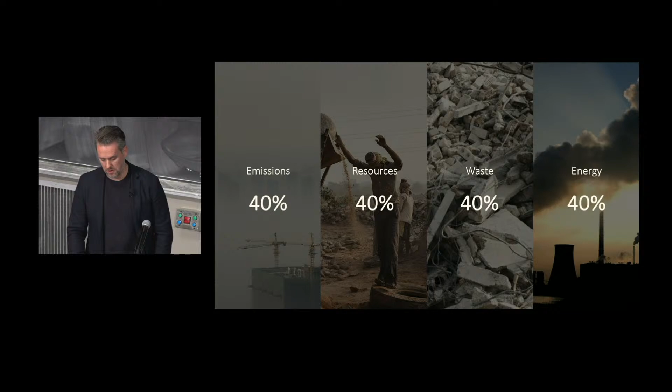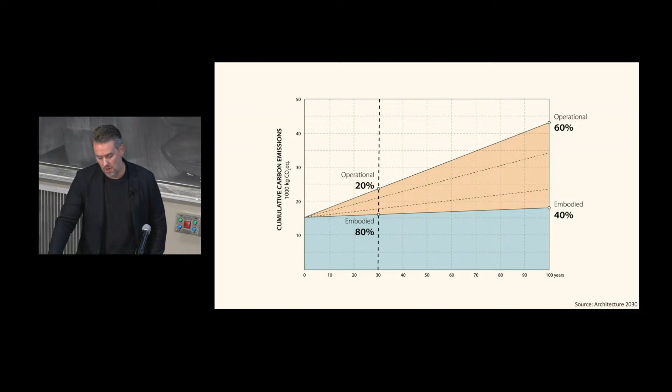These are rounded global numbers of the impact of our industry, building and construction, on man-made greenhouse gas emissions, resource consumption, waste production, and energy. Today I will be talking about the blue part. We can discuss what the percentages are. There are two key contributors to these emissions, the operational emissions and the embodied emissions. The embodied emissions have to do with materials, with building, and operational, as it says, is once we turn the key and use the building.

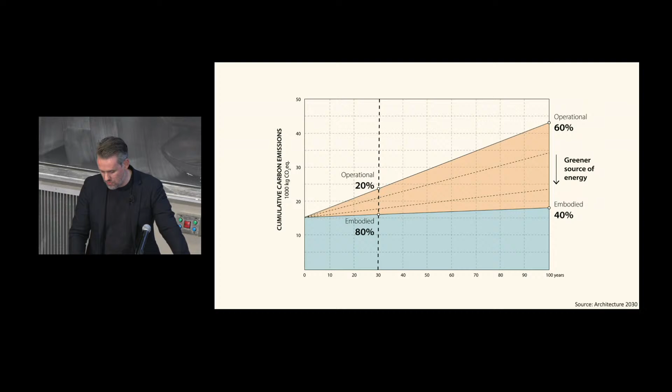One of the reasons that I'm excited to be a structural designer is that, in a cheeky way, I could make a bit of a shortcut here and say that if we have the political will and we all use green sources of energy, then operational emissions, check, right? That is not the case for embodied emissions. So there is no silver lining. We really have to rethink fundamentally how we do things.

This will be the only equation, because I'm also part engineer, so one equation seems appropriate here at MIT. You see again some usual suspects appear: John Ochsendorf, very early work with Catherine de Wolf, my colleague at ETH, also an MIT alum. I like this equation because it's simple and it very clearly shows the three main levers that we can use to reduce the global warming potential of a construction. Again, I'm talking about the embodied emissions. So what you see here is MQ, material quantities, right?

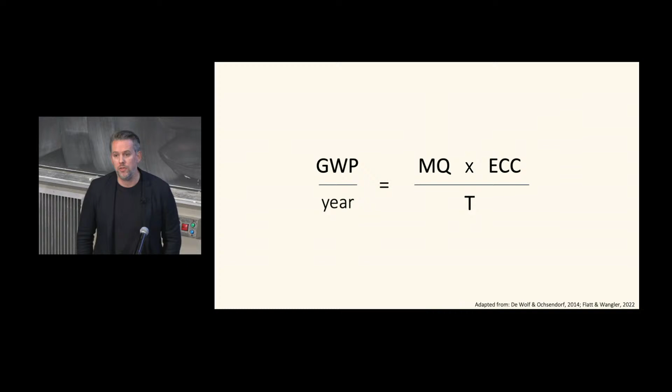Then we see ECC, embodied carbon coefficients. So per material, per where you use this material, you can calculate what the impact of that material is. And then T stands for lifespan, service life, so that has something to do with time.

So what's clear is that we want to reduce the amount of material that we use. To reduce the global warming potential, we want to use better materials with lesser impact. But we also want to actually rethink what is the lifespan of a resource, be it a material, a component, or a building. And I insist on standing here because I think sustainability is too often unnuanced and simplified.

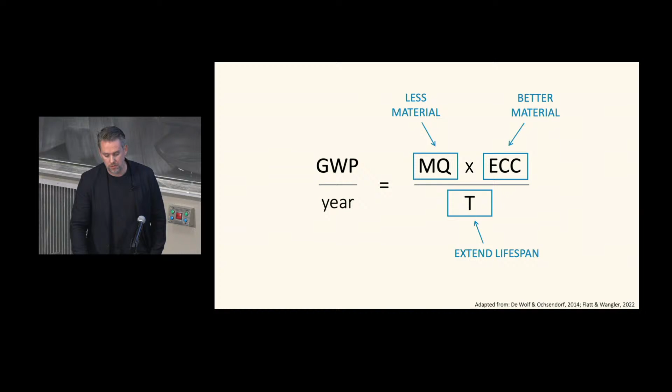And you hear all the time, wood is good, concrete is bad, for example. But here you see that it's a bit more intricate. You have to start to make compromises between these three parts. So the first one again is clear, less material, better material, and then can we find ways to extend the lifespan of our resources? So our group has been looking at this with these three approaches.

The first one, strength through geometry. This will be very clear what I'm talking about there. Second one, material effectiveness. As you see, I'm not using the word efficiency because it's not just about lighter, for example, but it's about using the material how it wants to be used. And then I will show you how we wrap it all together and we can extend lifetime by really being very precise about circular construction.

So the first one, strength through geometry. There, another quick wink to my advisor and eternal mentor, John Ochsendorf, these beautiful fan vaults at King's College. They are spanning 13 meters with simple stone that is standing still after more than 500 years because they have the right geometry. And the continuous bit is roughly 10 centimeters, so a few inches thick. So if you calculate the thinness of such a shell, then this is proportionally equivalent to an eggshell.

So when I started at MIT, there was a little bit of a resistance that I would be working on old structures. But the more I was working on them, the more I realized that we might have really forgotten quite a bit in modern design and engineering. So how do you even find the geometries of these structures? How do you know how safe they are? And so this was the starting point of my PhD indeed.

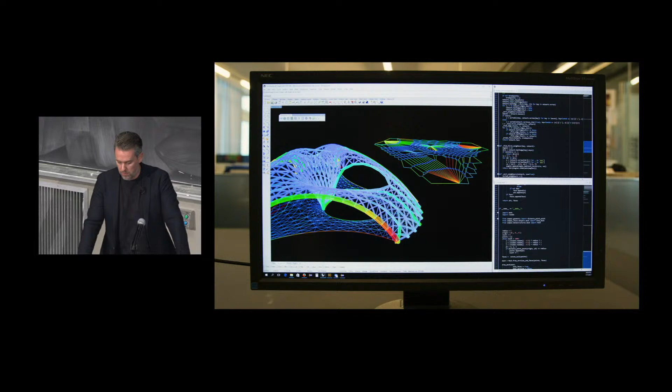We shared these tools very early on in tools like RhinoVault, so that this knowledge would not just be stuck with us, but everyone could start to explore. But you can do whatever you want on the computer. You can make a lot of fancy pictures. So we took the invitation of the 2016 Venice Biennale to clarify that this really works, that this is not just a fun toy to explore things.

What you're looking at here is called the Armadillo Vault. These are 399 pieces of cut stone that are held together like the old, beautiful Gothic masterpieces because of their geometry. So there is no mortar, there is no glue, there is no reinforcement. These pieces of stone were dry assembled by expert masons from Texas, the Escobedo group. And this then resulted in this statement.

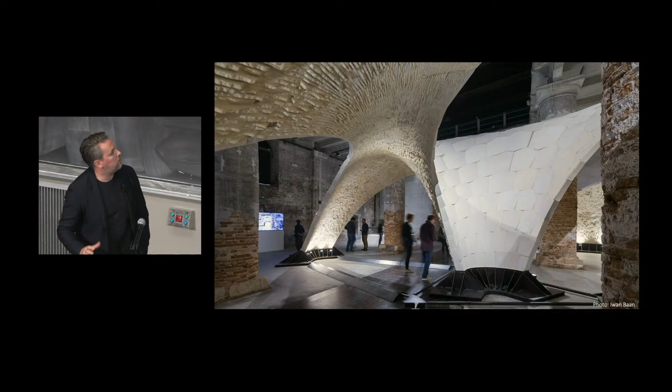We wanted to clarify that we should bring back these elegant principles that make a cathedral still stand after centuries, not just as an aesthetic statement, but really also a statement about efficiency and the beauty of achieving strength through geometry and not just through materials.

Of course, I could give you an entire lecture on what we had to do to realize this project in just 5 months, all the way from the new design tools and engineering tools to the fabrication optimization. But I want to stick to the narrative and what I want to show you with an image like this. So again, remember, there's nothing holding these stones together, only gravity, only their geometry.

So here we're talking about not even 2 inches of contact. And I hope this image speaks for itself, that if you get strength through geometry, you can significantly reduce mass, for spanning space in efficient ways.

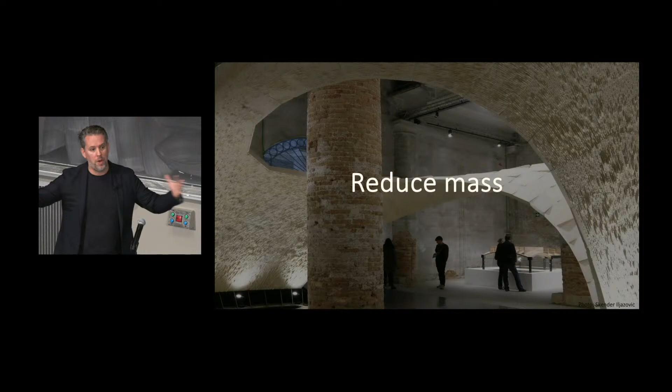I will piggyback on a project that I was very thankful to be part of, not from the beginning, but I could use my brand new concepts from my PhD to assess the safety of these vaults. You all know this project well, Mapungubwe Interpretive Center in South Africa, a project by Peter Rich, John Ochsendorf, and Michael Ramage. This project introduces tile vaulting, a Mediterranean traditional technique that doesn't need any formwork or scaffolding to realize these structures. So you build in stable sections from the boundary conditions onwards.

And so this technique was, of course, introduced in such a remote context because resources are scarce, and it was really important to activate local resources, not just the local villagers, but also local materials. So this is beautiful Catalan vaulting, Guastavino vaulting, tile vaulting, timbrel vaulting at work.

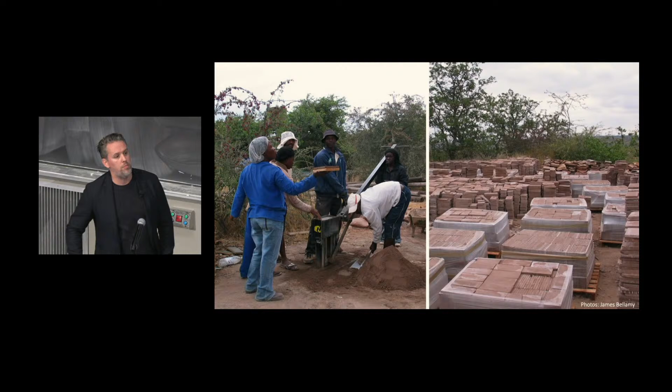But what's special about this project is that it didn't use the typical fired bricks that are used in the traditional techniques, but instead unfired soil-pressed bricks with a little bit of cement to stabilize them. And so these bricks were basically built by the local villagers one year in advance.

Why am I showing you this project? It's an older project, but when I see these 2 images next to each other, I'm still surprised that this works. On the right, you see that the tiles are brought on site in very small packages because they are actually extremely weak. They're designed to just take 1 to 3 megapascals in compression. I actually don't know what that is in PSI. So it's basically peanuts in compression, 10 to 15 times less than a standard concrete.

If you take one of those tiles, you can just break it in your hand. So this is not a material that you would consider intuitively as a structural material. And on the left, by placing the bricks exactly where the forces flow in compression, you see that this is indeed a robust system. And in fact, that is how we used to build. In many basements, you see these kind of little vaults appear. No surprise, because we wanted to activate these humble materials.

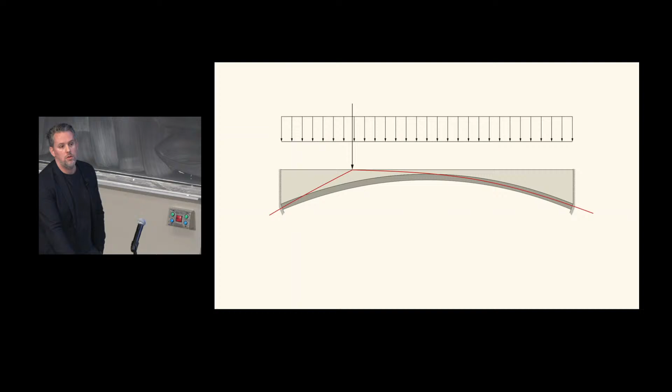Quick teaching moment. An arch is a very good geometry for a certain loading case. If you don't have a lot of double curvature, like in the Armadillo Vault, then you need something to take the live loads, right? The red line represents where the forces want to flow to the supports in compression only. So another strategy than using double curvature is to add stiffeners so that you provide a possible load path in compression for these forces to find their way to the supports.

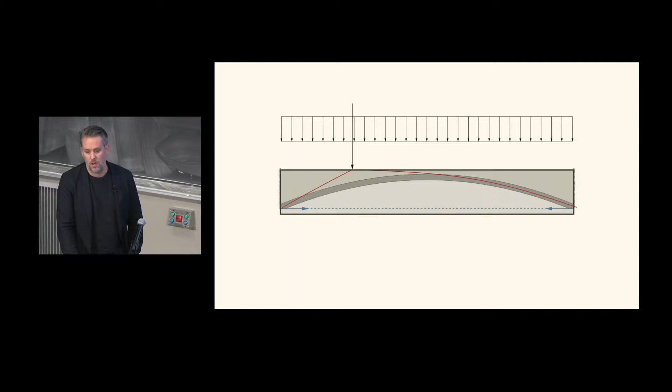And then if you add a tension tie, why the tension tie? Because an arch pushes on its neighbors, and so you can absorb this horizontal thrust with a tension tie. What I've just done with you in the last 20 seconds is basically providing a 100% structurally equivalent system to our reinforced concrete floor plates and beams, but one that uses 70% less material. So this is really not rocket science, this is just physics. And so this is quite dramatic, isn't it? Just by listening to the material and following where things go.

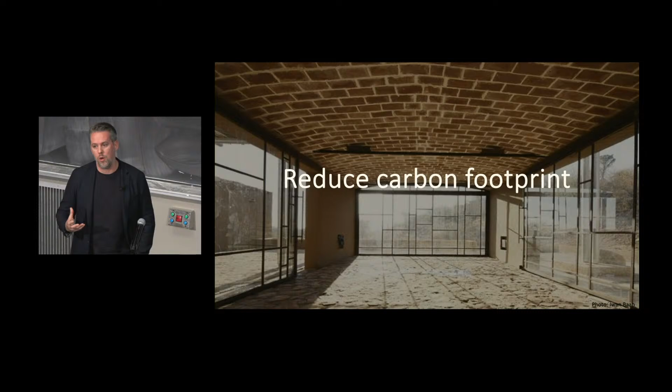And that is important because there's almost a one-to-one relationship between how strong a material is asked to be and what its carbon footprint is. So this is a second aspect why I care about activating strength through geometry, because we can reduce mass and reduce carbon at the same time.

Okay, big jump to this project here.

I will talk about it in detail later, but it looks a little bit unique. This project started in 2011 when I was almost a fresh professor at ETH, and I thought building shells was what one wanted to do. So let's quickly look at the roof.

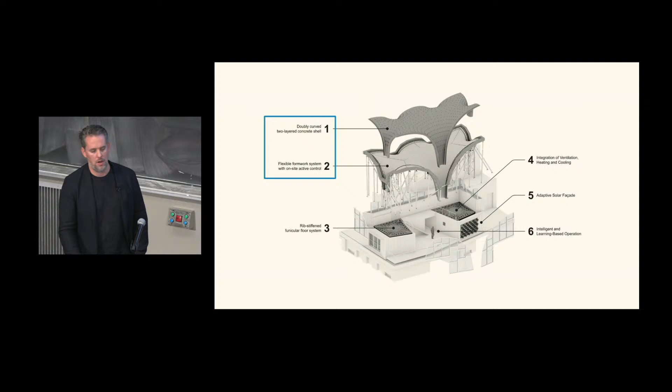So what we did there, and why I show you this, is it's another version of strength through geometry. There we actually use strength through geometry to make very efficient formworks rather than the structure itself. The reason for this is that structural geometry is non-standard geometry, it's curved geometry, and so we can design whatever we want. We want to be able to realize then these forms efficiently.

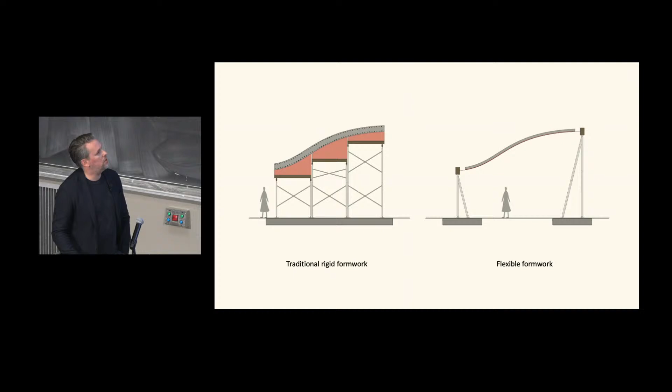And so what we wanted to do in this project was to use a flexible formwork where we then really understand how to basically stiffen that formwork because of its geometry again. So in this case, we go from compression only to tension only. So we developed this tensile formwork. We developed a kit of parts where all the cleverness is in the nodes, so that we could actually scale up this idea of flexible and fabric formworks to the scale of real construction.

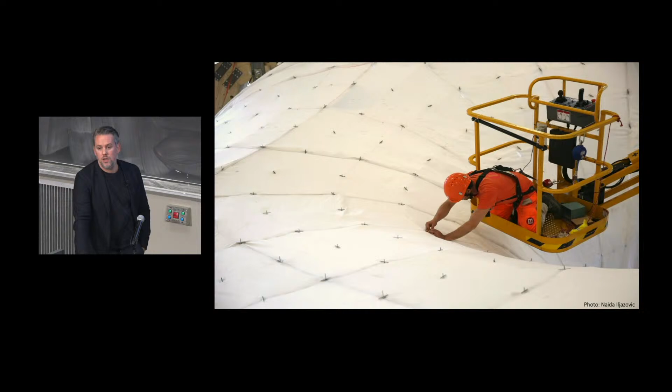These nodes allowed us to know exactly where the formwork is, to develop algorithms to retighten and really control the entire flexible formwork. But also the node actually helped to reduce this crazy complexity of the global efficient shell to a local reference of every 40 to 60 centimeters. The regular worker had that reference, where to place the reinforcement, how thick the shell had to be, how to install the insulation, and so on.

So this was a prototype. John talked about our facilities. So in this case, no robots were used, but we built this full-scale mock-up. And then we went on site with this building kit where the cable net, by the way, supports the wet concrete, and then the fabric allows you to apply the concrete on top.

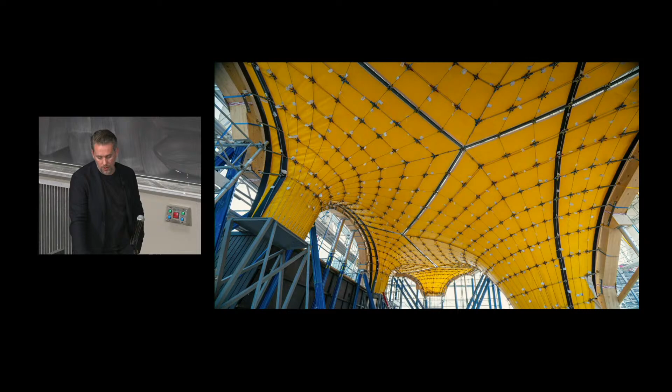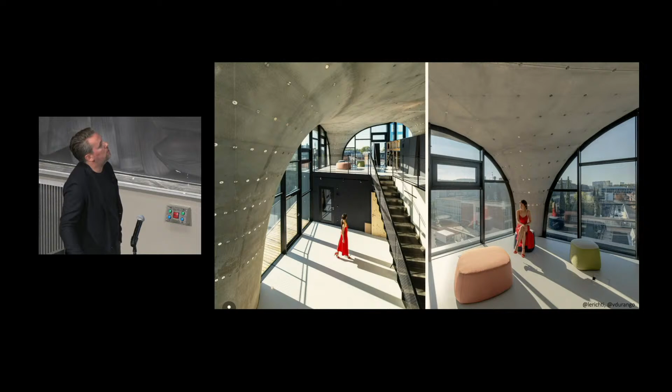So this is not a beautiful concrete, unreinforced shell as what I will be talking about mainly, but we're still talking about only 5 centimeters and 3 centimeters. It's a double layer shell of a thin structure here. So a quick digression, but nonetheless, we managed to use strength through geometry to make a super lightweight, efficient formwork. And you know you're doing something right when an influencer visits your project and takes pictures.

Another reason why I talk about this part of a project is because this was the first project that we did entirely using COMPAS. COMPAS is an open source computational framework for collaboration and research in the AEC industry. So it allowed us to really combine and introduce all these innovations into a real project. This is a permanent building.

And so all the way from coupling the fabrication to the FE and so on, this is not that new. But what is new also is that we used it, as our engineering colleague called it, BIM on steroids, so building information modeling, to connect all these different partners, more than 40 subcontractors that had to come on site, many of which had absolutely no experience with computation or complexity.

All right, let's get back on track. So the first one was strength through geometry. So I showed you that we can really address already 2 of the 3 levers with strength through geometry. Let's talk about material effectiveness. So when I talk about concrete, and I will be talking about rethinking also construction in concrete, you typically think of this. But this is actually not concrete, this is reinforced concrete.

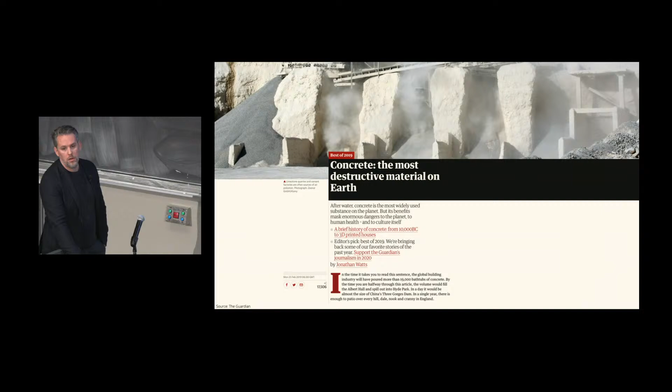And indeed, we have been using reinforced concrete because concrete is like stone, a material happy in compression, but not in tension, not in bending. And that's why we have to make this hybrid material. So concrete has been under a lot of scrutiny. It's the evil on this planet, as many state very, very clearly, like here, a big feature by The Guardian in 2019. But is it correct to just focus on the material? I already gave you a hint in the beginning.

It's not just about the material, but it's the combination between where you use the material, how you use it, how much, and then also the lifetime. You can use all kinds of charts, from the famous Ashby to the ICE, which is one of these databases that calculates embodied carbon coefficients here per unit mass.

The LCA or sustainability experts in the room might say unit mass is not the correct metric. That's not my point. You can use any calculation. You will see that if you look at concrete itself, then it is not that bad of a material. In fact, it ranks much better than other typical materials we use, engineered timbers, steels, and so on.

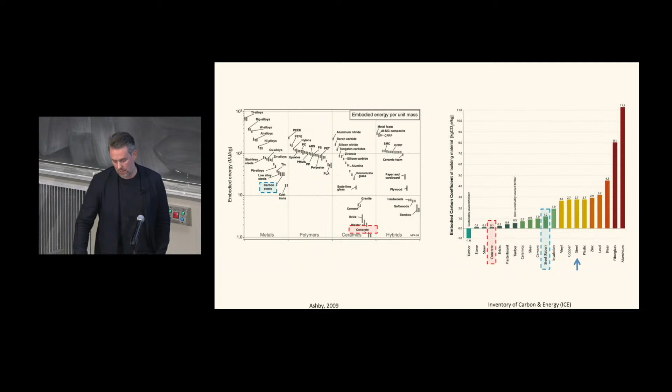You see that steel is at least 10 times per unit mass higher on the embodied carbon coefficient. And by the way, I'm using 100% recycled steel because that is common practice, at least in Europe, for any reinforcement. So if you were to use virgin steel, then you are talking about factors of 30. The point here is that what about we start to look at concrete as the artificial stone that it is? And you probably see where I'm going with this.

So if we listen to the material stone, artificial stone, then perhaps these beautiful geometries of the past are indeed the right geometries. So indeed, we already looked at this. We can not only reduce the mass globally by 70%; more precisely, instead of forcing a material to be in a geometry that it doesn't want to be, that flat floor plate or beam, you reintroduce the natural arch, then you see that we, for free, get 70% reduction of concrete and 90% reduction of steel.

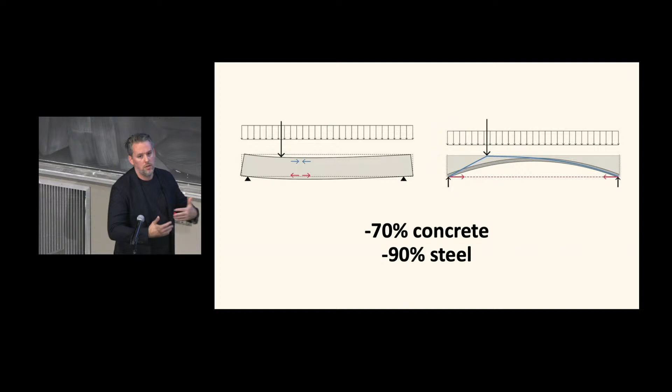So we thought, okay, instead of only having the simple arch with the stiffeners, can we do more? And we translated this in 3D. So what you're looking at here is a structural model that is a 3D vault that accumulates to corners. Then you see that the stiffeners that take any loading case in compression to the corners also accumulate to the corners. And then what you just need is a restraint of the corners that, for example, can be a tension tie.

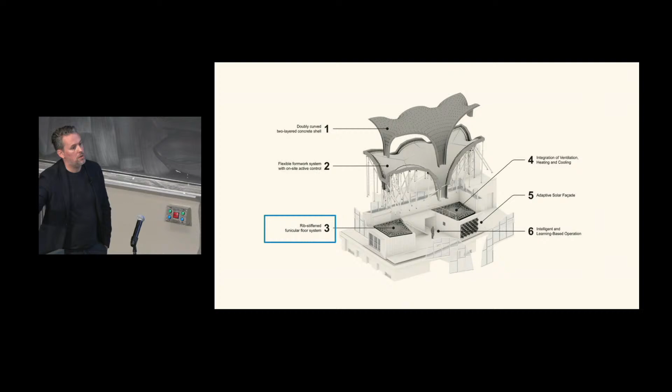And that is also why I showed you that crazy project with a wild roof, because it was the first time that we could, in a permanent building, show this concept in our context, so in Switzerland. So the floors that you look at have an average span of 5 meters. But if you look at the section, the structural thickness of these floors is 3 centimeters. So how much is that? Just over an inch? Yeah. So 1 inch thinness, unreinforced concrete, low strength concrete with more than 50% of recycled content.

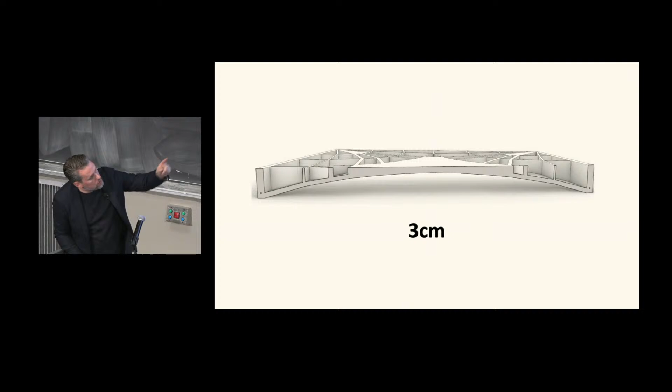By the way, maybe you've noticed this little dot there at the corner. This little dot is actually drawn to scale. So we have a 12 millimeter steel rod that holds it all together. So that is the only reinforcement bar. So of course, dramatically different than how we build our structures. You can go visit it. Everyone is very happy in there. There's no cracks. Everything works perfectly like the Gothic or any masonry system indeed.

All right, why am I excited about this one project here? Well, we have some more challenges, not just the global impact, but also the next 20, 30 years there will be many more people on this planet. People like Bill and Melinda Gates in their annual letter in 2019, but I believe others before, have calculated this to really clarify what the challenge is for our industry. In order to provide adequate housing and infrastructure for all these people still to be on this planet, we will be building the equivalent of one New York City every month for the next 40 years.

That is really a daunting task, already considering that we have these very negative impacts. Another aspect is that we are densifying, we are building higher. This is not necessarily my vision of the future, but it is a reality that we have to address also the typology of medium high-rise construction.

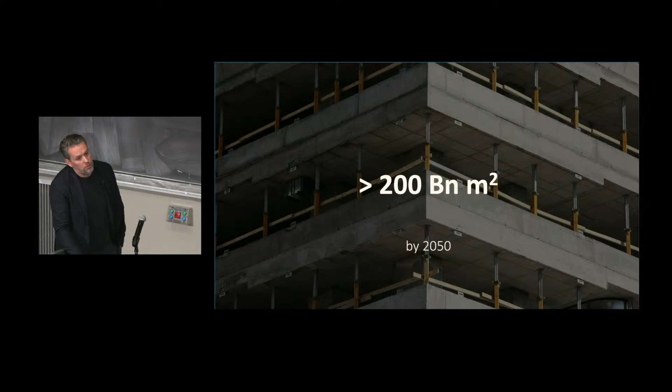If you then zoom in a bit more, then you see that more than half of that structural mass is in the floors. So another way to translate this New York City story there is that we will be building more than 200 billion square meters. So that is 2,000 billion square feet in that same period, right? And so we can maybe talk about in certain contexts that we can no longer construct, but this is not relevant for the rest of the world. So let's hopefully and please not do it like this, right?

So let's go back to these structures and let's take one of those. So just to clarify to you what the impact could be of reintroducing these simple principles in everyday construction. So what I'm going to do with you is take a simple building, a simple floor plate here as a reference, 25 stories with 7.5 meter spans here. And we will introduce the principle that I talked about to replace all your typical reinforced concrete floor plates. So we will be, of course, taking advantage of the fact that more than 40% of the weight is in the floors, and we will count on those savings.

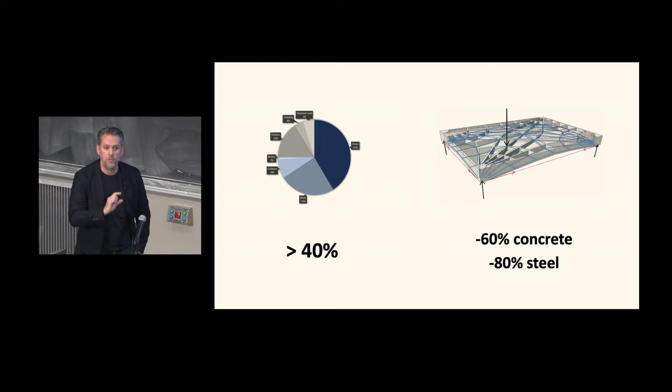You see that we are no longer at 70-90, because in a real building, it's not just about structures, it's also about acoustics, vibration, fire safety, and so on. So you have to put a little bit more material in there. So what happens? What are the savings by just replacing the floors by this principle? You would save more than 7,500 cubic meters of concrete for this one building. If that doesn't mean anything to you, I translated this for you. This is more than 1,200 concrete trucks that would not have to go to this one building site.

And per story, so per level, you would save about 26 kilometers of reinforcement steel. So that is about 16 miles of reinforcement per story, which is a lot of reinforcement altogether. And coincidentally, it nicely rolls out from Zurich, where I happily live and work, to Brussels, where I'm proudly from. So that is more than 600 kilometers of reinforcement steel.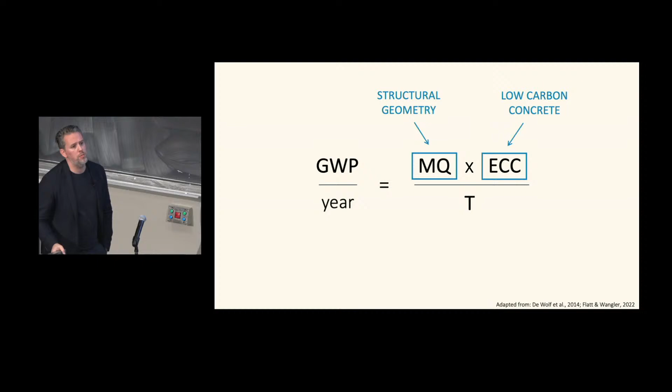So in the beginning, I said it's not just about the material. Here, I should also not get carried away by just being proud of these volumes. What really matters is, again, the equation. So it's balancing the two. So what have I been saying here? So structural geometry, I think this is clear to you. We can directly reduce the material quantities. We can use state-of-the-art materials. So for example, the low-carbon concretes that are already commercially available today.

But structural geometry, remember, also gives you another benefit. It actually allows you to reduce the stresses in the system. So you can actually use lower strength materials. And let's see how that plays out if you do a few numbers here. So structural geometry, again, gives you two things. Directly less mass, but also lower stresses.

And so sorry, I don't know what the equivalents are in the US, but C30 concrete is a very standard, almost very regular concrete. So you see that the mass we can directly take off, but by going to lower strength concrete, so from a C30 to a C16, so C16 is typically not used for structural applications, you have an additional 20%. And then the state-of-the-art today of concretes that use clinker replacements in their cements. So for example, a CEM3 concrete, you can, on the material level, reduce the emissions by another 2/3.

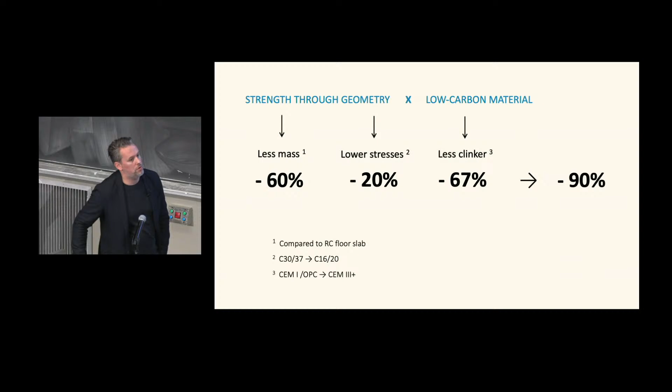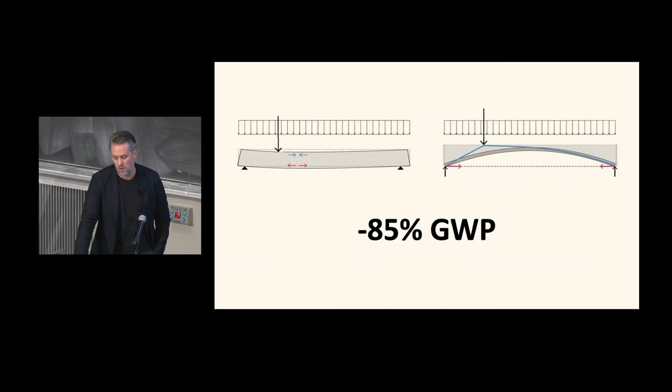So even though we take only 60% of material out, you see that the total effect is 90% reduction in global warming potential. We will take the steel as is. So this is what we can do today, right? And so again, this is not an exaggeration. This is just, again, following the steps very clearly. So instead of forcing a material in a geometry it doesn't want to be, we reintroduce the natural form, and we have today a solution to replace all our floors with a system that has a whopping 85% reduction of global warming potential.

So let's look at the numbers a bit more carefully. So if we were to build, as we always do, right, our typical reinforced concrete floor plates, then the best we can do is 50% reduction of global warming.

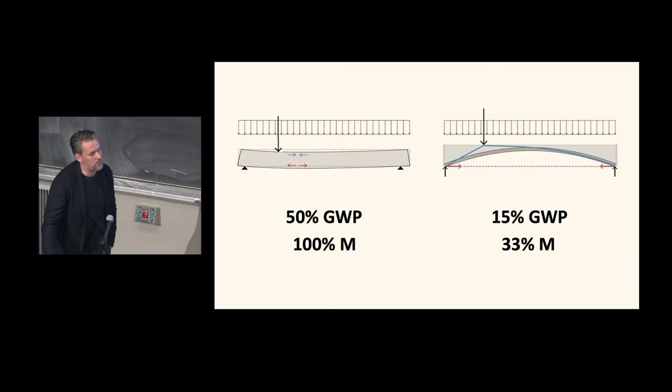Where does that come from? We're playing on the concrete, but we have the same amount of steel. So that ends up being a reduction of half. Not bad, of course, but we have the same mass. So the numbers on the right, you see that we have a much larger kind of reduction, but we also save on the weight.

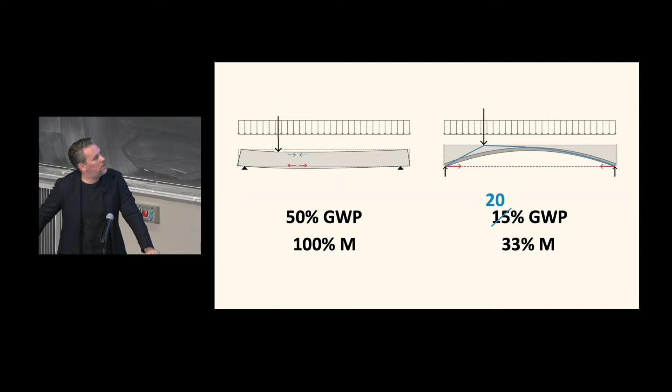What am I showing here? If you were to use regular concrete, so CEM1, OPC cement, so ordinary Portland cement-based concrete, which I think is criminal if you still do this today, by the way. So if you don't use any green concrete, then you see that we still have a reduction of 80%, right? So this shows you a little bit how important design is in doing things better, because everyone is talking about materials, and see now here how much design can have an influence.

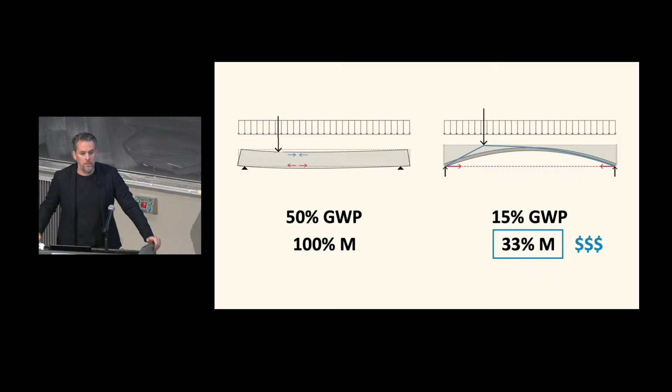Another aspect that is important to point out is here this weight reduction, because this is direct dollars. Bill Gates has introduced the term of green premium. What does that mean? That sustainable solutions, he says, will always be more expensive than our status quo, things that we have been optimizing for decades. Yeah, that is typically true, but so how can we then deal with this green premium? This is the strategy that we use.

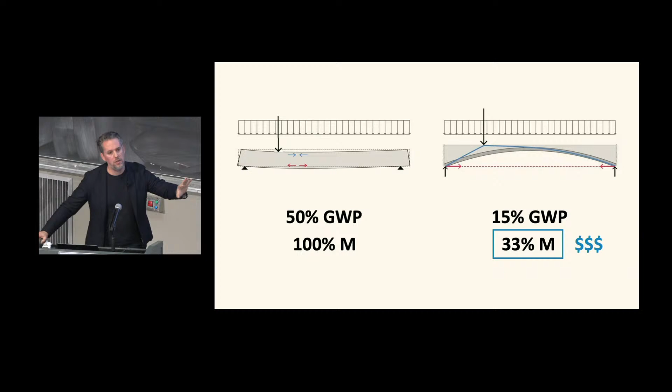Because our floor plates are so much lighter than the reference, we can save on the columns and, more importantly, on the foundations. And so that means that on the scale of a building, and this building actually doesn't need to be that big, already from 5 floors you see this effect happen. You can actually offer all of this sustainability cost neutral for the client. And I wanted to bring this in because at the end of the day, we can preach about sustainability as much as we want. If you want to have impact in real life, the cost is the only thing that matters, sadly.

All right, let's now bring it all together with circular construction. So here I will first do a quick tangent and show you a project where we made another statement at the Biennale. This is a fully unreinforced concrete 3D printed bridge. How does it work? So we used the same inspiration. We look at concrete as an artificial stone. So we look at stone in 2 ways. Global discretization, like an old aqueduct or a little structure here. But also on the level of the material, we wanted to basically have a perfect alignment orthogonal to the dominant force flow, right?

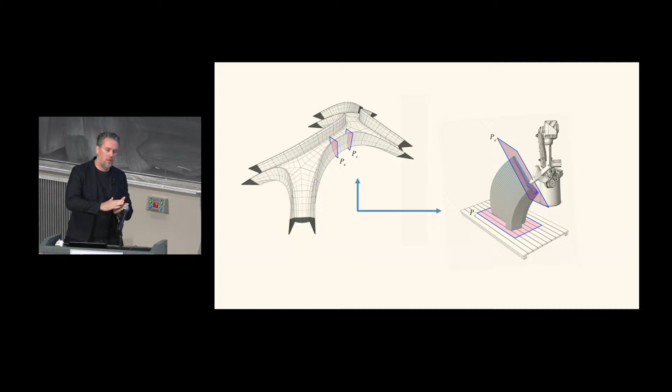So we use masonry on 2 levels. The global discretization of the bridge follows masonry principles. And then on the level of every single element, we try to align our material to be as perfectly orthogonal to the dominant force flow as possible. So this is possible because of 2 components, state-of-the-art 3D printing. You see that you can have these non-parallel kind of print layers and so on. And that allows you to place material only where needed.

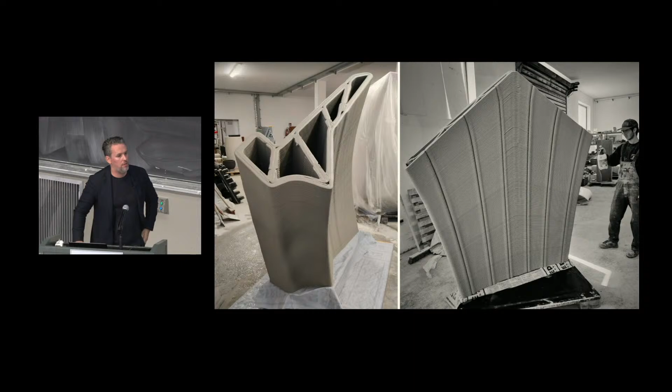So we want, for example, structural depth, but we don't want a full solid section. So we make a hollow section. And on the right, you see exactly where needed. These are these bifurcating elements, and we want to be aligned to the force flow. This small bridge that I showed you, so 16-meter span, 53 blocks, all of these pieces were 3D printed in a total of 84 hours, right? And so this is exciting. It's something to kind of look out for.

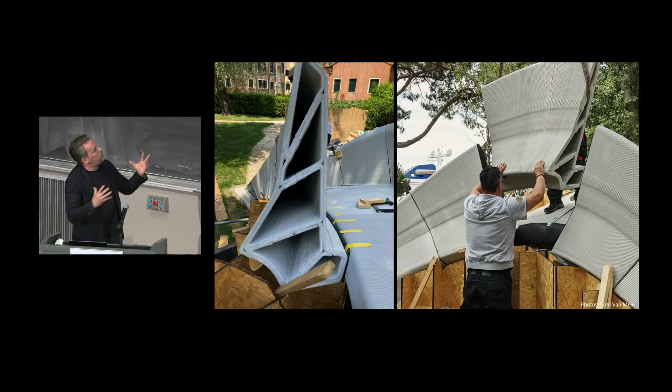So here then you see my team together with our usual suspect, Tom Van Mele, assemble this structure like a masonry system, dry assembled, again, to make sure that no one is confused about how this bridge works. And then here we basically put these pieces dry assembled together. You see maybe the black interfaces is neoprene; you need something to distribute the stresses at the interfaces, and so this is a dry, disassemblable kind of joint material that we developed for this.

So I was excited. This was a beautiful collaboration with Zaha Hadid Architects, with the CODE group, a computational design group, and incremental3D. I was excited that we could show this project, not only to celebrate its aesthetic, but also to really show that we hit several of these R's. So we reduce by placing material indeed exactly and only where needed. We think of repair, and in fact that was already relevant because one of the pieces broke in transport and we could locally repair it.

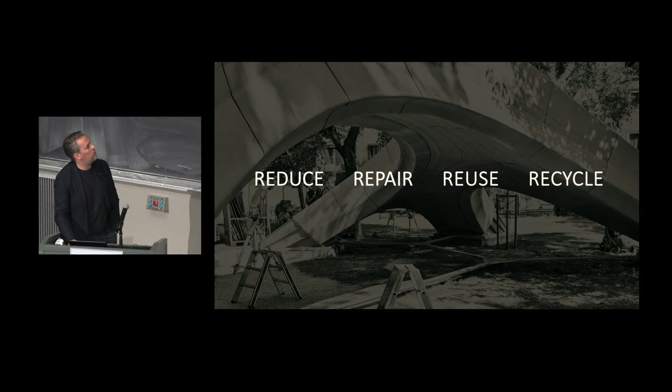We keep materials separated, so the tension ties are separated from the unreinforced structure so that we have an easy recycling opportunity. And also, maybe not that relevant for this bridge, but you put it together like a masonry system and you can take it apart as easily as it was assembled. So you could literally reuse these components in another project.

So this is how it looked. This was in 2021. You see some features, again, that were accidents in the fabrication that we then started to use to celebrate and show how this structure works. And so here we brought all these different ideas together to make a statement.

Those of you who know about concrete 3D printing, this was, again, a provocation. We wanted to show that perhaps if you listen to this material, perhaps this is how you want to use it instead of trying to print full houses and causing a full mess that you have no idea how to maintain, how to upgrade, how to recycle at the end of lifetime and so on. So this was a bit of a statement in this direction.

But for me, the key point here is, again, circular construction made possible because of masonry on different levels. So this is the next step for me. It's not just about strength through geometry, but it's also about pure masonry systems that give you all of this circularity. I show you this just as one of these after-the-fact computational pipelines.

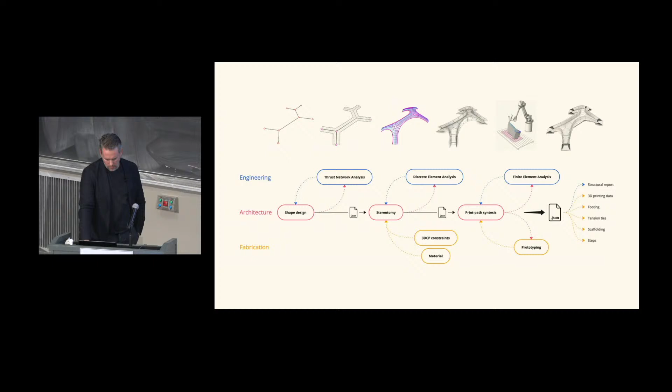I show this because on this project, the entire team, all the way from designers, engineers to fabricators, never met a single time because the project was done 100% during COVID, and we only met at the opening of the bridge. And so this is again where computation, where COMPAS brought all of us together to build on each other's strengths and specialties.

The sponsor of this project was Holcim, because there is a nice connection there. We had an opportunity to actually do a second iteration because this was for an exhibition, so it was only there for a couple of months. So this is Phoenix. It's called Phoenix because it was built from the ashes of Striatus. We took it apart, we ground it, and this bridge was built entirely out of recycled Striatus.

So what's also special about this project is that this is now a permanent structure. So we used a totally new 3D printed material. This was built in Lyon in France. If you know France, it's a very bureaucratic process to get anything built. So I'm very proud that we have a permanent structure, a 3D printed structure using a 100% recycled kind of binder.

So what we also did: you could have criticized me, like, yes, but you make this efficient structure and then you build it with all this timber. So here we developed, again, a kit of parts using rented components and only very locally the use of timber. That allowed us to pre-assemble things, assemble it really quickly, and really also to go one step towards a possible commercial relevance of these projects.

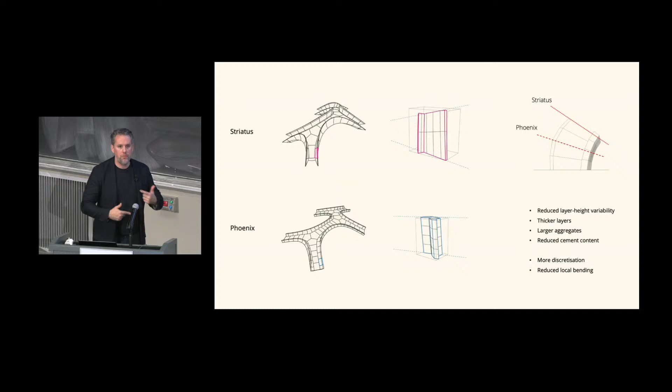Nothing comes for free. So how did we learn from Striatus? We reduced the block sizes so that we don't have these extreme angles. Why is that important? Because then we can use a lower strength concrete, a real concrete and not a cement paste. So we had to restrain all the degrees of freedom here. We optimized the internal stiffening schemes.

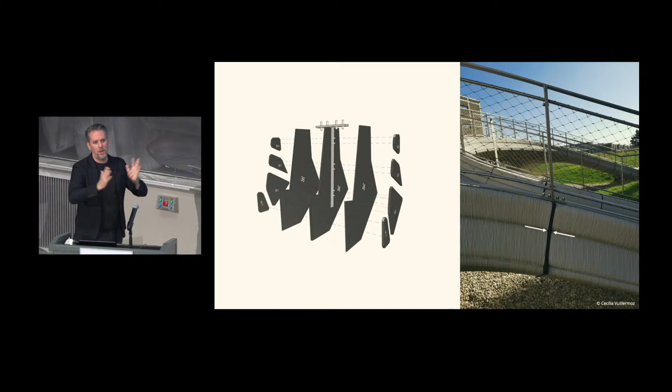But also, and I'm pretty excited, I always teach this beautiful Padre Pio church by Renzo Piano. I don't know if you know this project, but it's super elegant how basically the roof is being held by these arches. So finally, in a very humble way, we managed to have the balustrade not connected at all, but just held in place by the arch action itself.

Again, this was an important detail because that meant that the entire structure can be taken apart very simply, and circularity was directly taken as an important design driver. This is part of Striatus shredded, so it becomes basically the material for the next project.

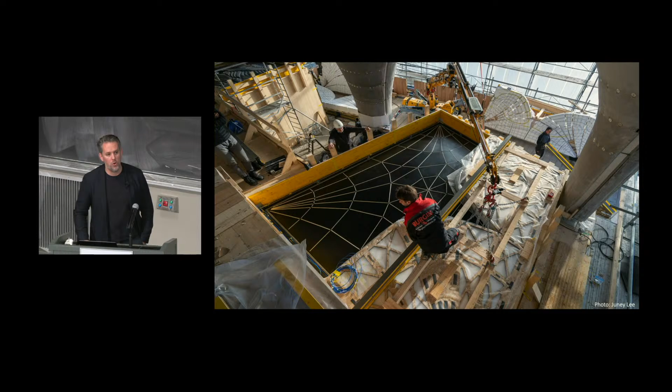What I didn't say there, and remember, we are in the part circular construction. What I didn't tell you earlier, when we had our 3 centimeters of beautiful shell and so on, is that we built it like this. On a one-off mold, super expensive, super wasteful. Then we left the counter mold in it as well. We used polyurethane, big no-go, and so on.

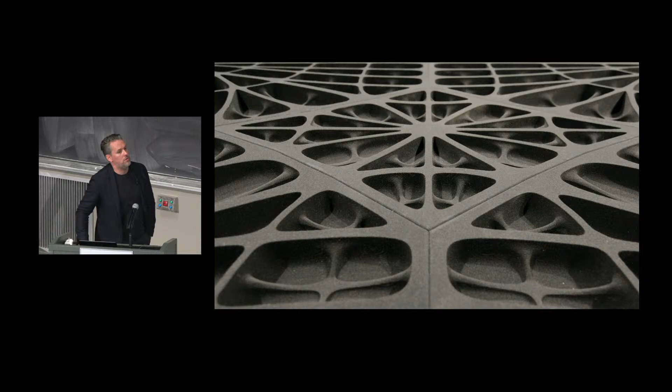I hope you forgive me that we were already trying to push quite a few things in a real project, 3 centimeters, unreinforced, and so on. But this is clearly not a scalable way. This is not a sustainable way forward. So that meant that we basically addressed everything on top, but we didn't address the service life and the circular construction on the bottom here. So we evolved our system. We took this first success, this first benchmark, to go to what we now call the Rippmann Floor System.

So here I will combine everything that I've talked about. We use our low strength, low carbon concrete. We keep our material fully separated so that we can easily recycle it, and a fully unreinforced structure gives you also all kinds of durability benefits. You don't have embedded reinforcements that you have to protect that could corrode over time.

For the material scientists among you, you can have carbonation happen the entire lifetime. That means that you absorb CO2, which typically you cannot do because that causes corrosion to the reinforcement. So here we can happily have this happen. We do dry assembly, like the masonry system. Again, this gives us an opportunity to take the structure apart and reuse the components directly.

And then last but not least, we add prefabrication, so off-site, very precise construction, so that we don't have all these crazy safety factors that we need on site, because concrete on site is a messy business, right? So it also looks good.

So we had the success of the HiLo unit, and there was quite a bit of interest. And that is why we actually were happily forced to start a spin-off appropriately called Vaulted. The reason that we set up this spin-off in early 2023 is because we actually already won a competition with the famous Mike Guyer from Gigon Guyer Architects, an entire building designed entirely around the Rippmann Floor System.

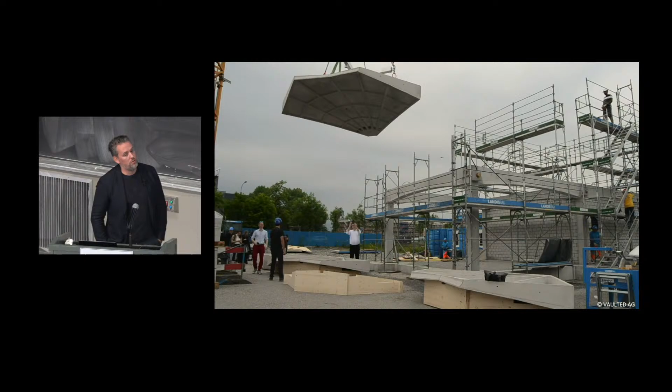In Switzerland, by the way, a tower is anything above 25 meters. That's really not a tower. So this is a tower. It's called Crea Tower. It's a 10-story office building. What I'm showing you now is not a prototype, but a full-scale mock-up for the construction. This project goes on site in early spring, and this was a test run with all the contractors to reassemble our system.

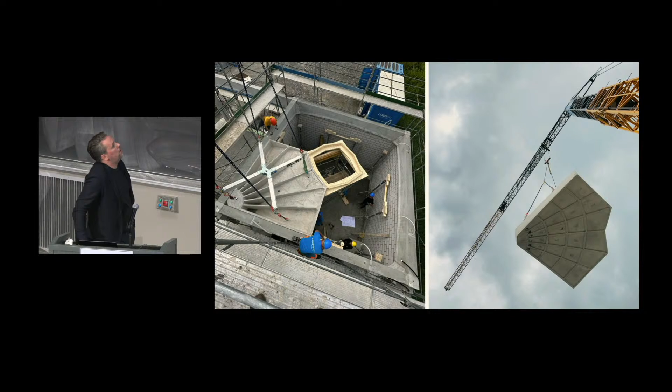These elements are, again, low-strength concrete, C16, fully unreinforced, and dry assembled on site. Per bay, here moderate spans of only 6.5 meters, this is assembled in 1.5 to 2 hours, and then you can move to the next bay and so on. All of these elements were designed, engineered, and fabricated by Vaulted. We developed also all the aspects, how to assemble it on site, how to lift the elements, and so on.

This is, by the way, my partner in crime, Tom, who was guiding the entire process and educating the builder that anyone who can operate a crane can install these beautiful masonry projects. Here are some more images, and this is how it looks from the top. You see the reference is not far away. From the bottom, for this specific project, it looks like this.

So now you could say, but are you sure? What about seismic? What about acoustics? What about vibrations? Obviously, this is a real project, so we had to test all of this. Here a nice ghetto load test situation with these little baths, a very efficient way to apply all kinds of loading cases. We did fire tests on the materials, but we had to do quite some advanced modeling.

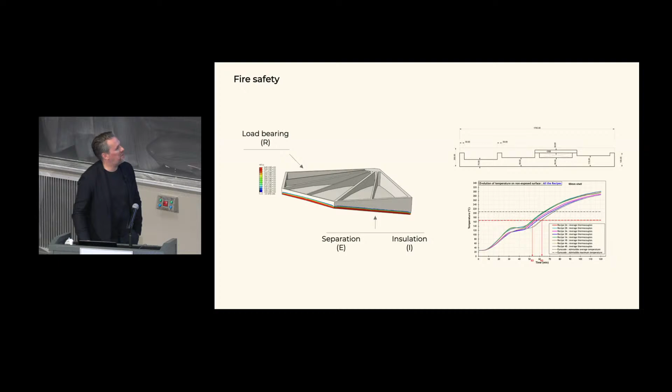5 different engineering teams have checked our fire safety models, so no stone was left unturned in this project. We had to really carefully optimize the acoustics, not the room acoustics, but actually the contact noises, right? This is a lightweight shell, so how can you make sure that you don't hear your neighbors and so on?

This was an interesting challenge. Room acoustics also needs to be checked indeed. And then, from all these tests that we did on the prototype, this is the final status quo. We hope to still squeeze it out a little bit. We reached not 85% in our very first project, but only 50% for now. But I'm very proud that we are doing this, and this is being done.

So more than 6,500 square meters of RFS will be built in this project. It will look like this. From the bottom, it looks like this. And here again, a section. As you can see, all these little vaults appear. So this was done. This will be quite a large project. More than 150 bays, 180 bays of RFS will be installed.

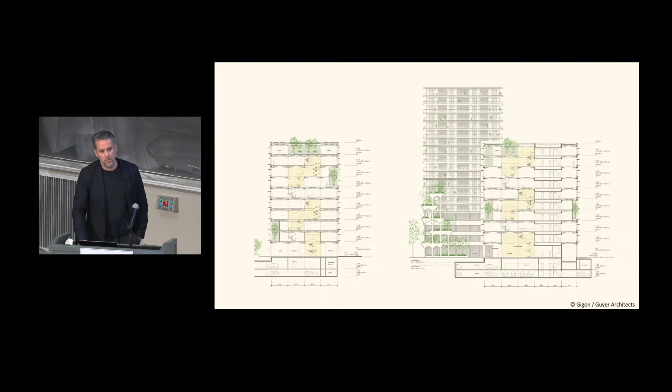We have not sat still after this because we want to have impact and we need to solve it all. So we did full proper certification tests in Switzerland. So we have all the acoustical measurements, all the fire safety has been now tested in the national laboratory at EMPA so that we can go forward. All right. Well, maybe I will show this.

So also here, we as Vaulted interact with all kinds of different people in the industry. And what is the solution? COMPAS. So we use 100% the open source framework to basically connect us to all the different players in the industry. And that is because all these different collaborators need different models, different information, and so on. But why I show you quickly this slide is not to show you how we do it internally, but that all these different steps are basically based on open source packages that you can find on COMPAS.

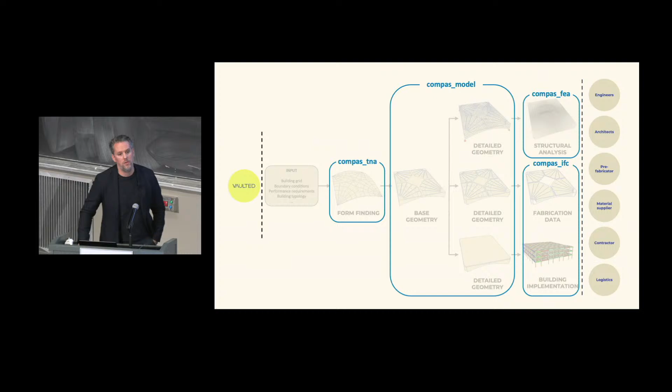And I find this extremely important that we don't keep all knowledge in all these bubbles. It's crazy how many people are reinventing the wheel by not sharing. And so, even in a commercial setting, we want to lead by example and basically share open source all the different packages that we developed to get there. All the way to, for example, advanced BIM modules that allow us to collaborate with industry.

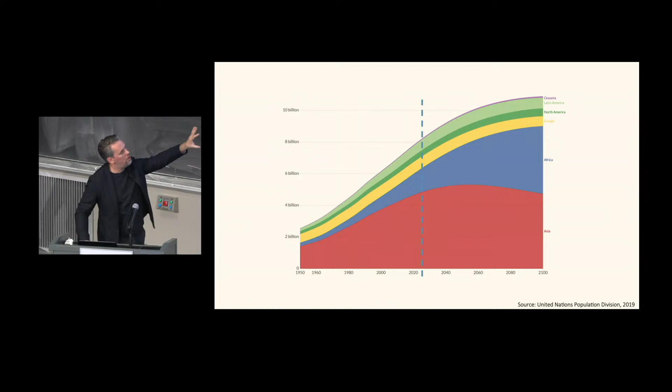All right, and then in closing, and I'm going a little bit long, but I wanted to also address one more leap, right? I'm excited to have impact in my context, but the reality is that most of this building is not happening in Switzerland. It's also not going to happen here. It's happening in the developing part of our world. And you see this in these clear graphs. You see us rather status quo up there. There will be a little bit of construction in our context, but where it's really relevant is of course in Asia, and then increasingly the African continent.

And in that context, I'm very proud that I get to work with the government in South Africa to address that aspect and to bring a version of what I've been talking about together with my local partners to that context. So more specifically, we had been working with the Department of Environmental Affairs from 2018 onwards, and they have this amazing concrete. I don't understand why not more people know about this. So what is this concrete?

They have a big issue with non-indigenous plants. They were brought in a colonial kind of context. These plants are not tailored for the African context. So they suck too much water out of the ground. They cause the local flora to disappear, also the local fauna to disappear. So they are massively cutting all of these invasive plants. They're shredding them, and they found basically a bioconcrete where all this shredded bio-waste is being used as replacement for the aggregates in this lightweight insulating concrete.

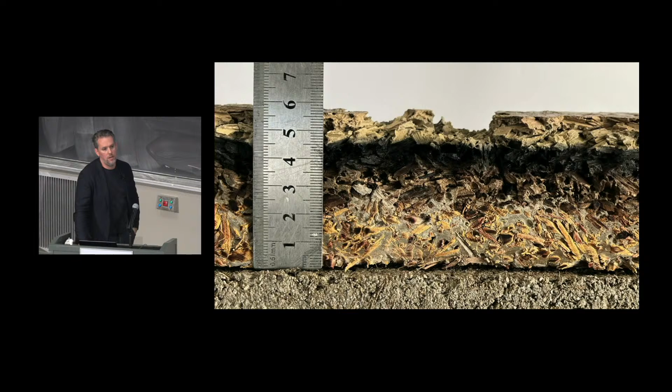This concrete has a super interesting behavior. So the first layer kind of chars. This is after a fire test. And then it is stable and it really works quite well afterwards. But they were using this concrete only for non-structural reasons, right? And then they got in touch with me because they heard that you can actually activate low-strength materials. You can take the steel out, which is really the bottleneck there for low-cost housing. That is the most expensive one.

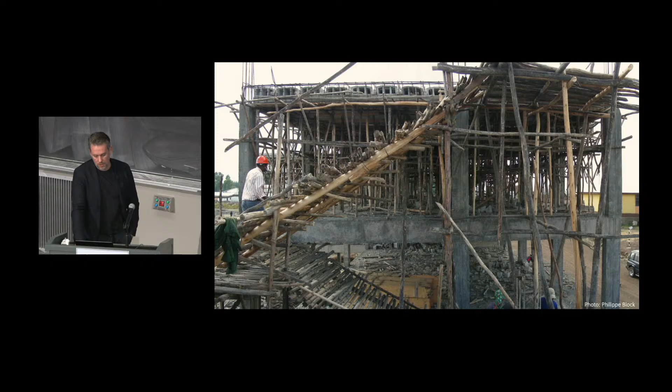And yeah, they also are stuck with trying to build like we have done in wasteful ways, trying to address it a little bit. This is a picture that I took myself when I did some work in Ethiopia in the very early days. So what can we do there? How can we do even better?

How can we take the steel out? Well, again, no surprise, it's by going back even further. What if we reintroduce the buttresses so that we can find ways for our load paths to go to the supports? And so we developed with them this kind of system to really have unreinforced buttresses, simple vaults, and then just one transfer beam that activates all of these elements. So we did these prototypes, big success, everyone was happy.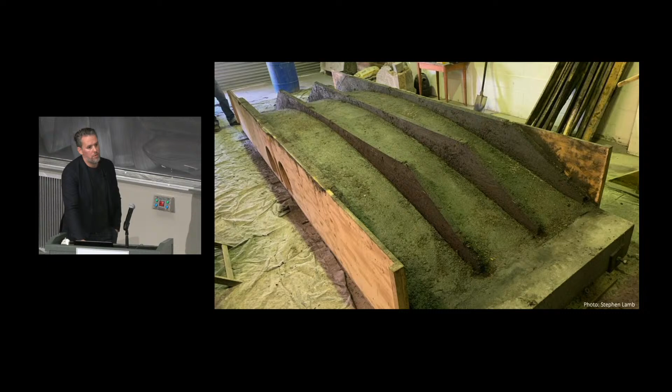You see these stiffeners appear again, right? So very much inspired by the early projects, John's work in Mapungubwe and so on. And then here, all of that great. We were ready to go to do a demonstrator project. What happened? Can you guess? 2020, COVID. South Africa was extremely badly hit, and so everything fell flat.

But we kept thinking, and now we're back on track. So the project is back. We got some new funding, and we introduced one more idea to introduce the 3-hinged arch and to introduce prefab as well in this context. So here are some images. Actually, this is significantly less smooth than what I said before, because I have absolutely never shown this to anyone. This is hot off the press. We did this just a couple of weeks ago.

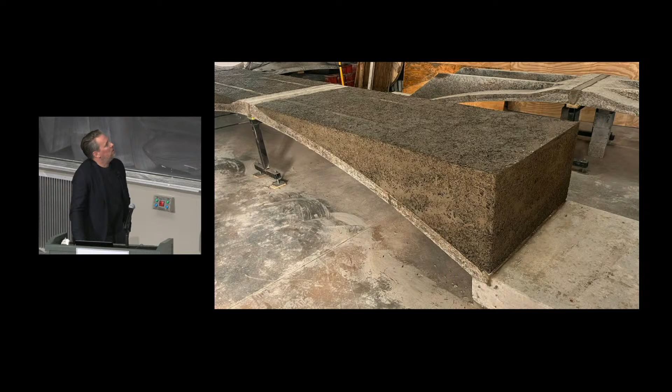So here what you see is that we use higher strength material where the forces really want to be. We use lower strength material where we want to get to the floor level, distribute the stresses. Again, nothing new there, right? My title was Learning from the Past. Well, the Guastavinos already had this insight, right? If you want to stiffen your shells, you add either stiffeners or you actually raise it with a stabilized fill so that you have a solid package where you can imagine all these load paths to go.

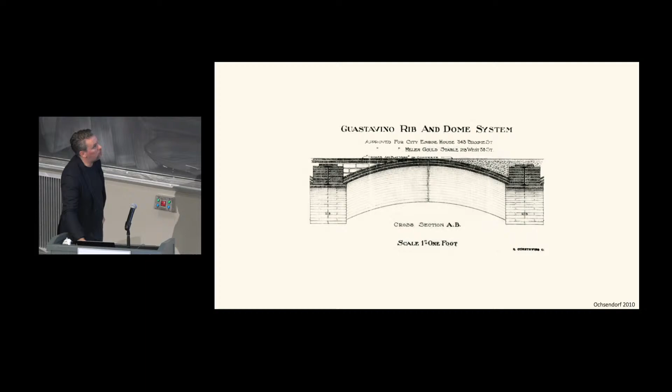What we decided to do with our partners in South Africa was to use both, to have additional redundancy to the system. And then, of course, the funding round that we are doing now is actually certifying these floors. So we already have certified the material. So it's a fully certified material in South Africa that is called an agrément in South Africa.

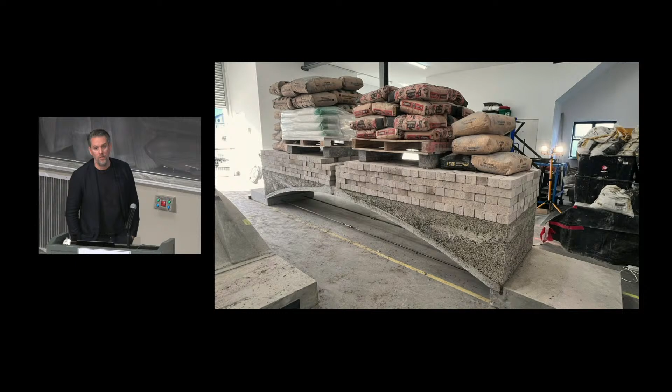Here you see the load test, a lot of excitement. You see there in the back, Andrea, my research assistant, joining remotely and checking and instructing everyone to do it properly, all the different loading cases and so on. And of course, after you do the proper loading test, like anyone doing a structural test, you try to load it with everything you find, and sadly nothing happened. So this was basically all the cement bags, everything that they could find in the shop, so more than 10 times what it should be carrying.

And then the only way to make this structure collapse is, can you guess, John? Move the support. That's right, take the tension tie out, and so then it's just a curved beam. That doesn't work, you need an arch. So if you take the tension tie out, this will come down indeed. So now the final step of this, so we are one step away from having full certification for not only the material but the entire system, is the full-scale fire test.

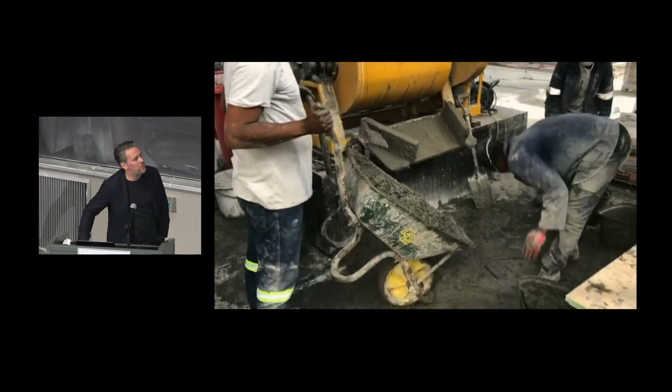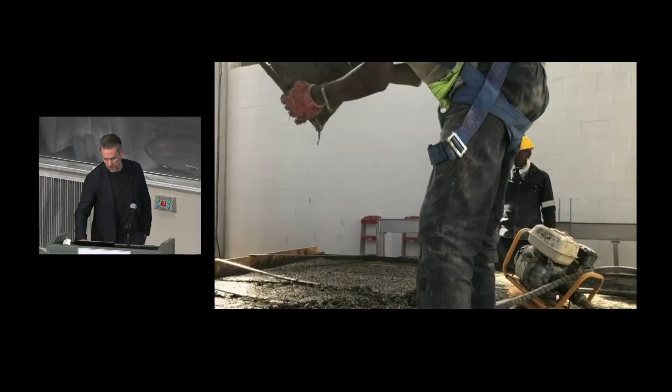But I wanted to show you a few more videos here to see what kind of unique, very weird rheology here, so very sticky material. But our local partners, Noncrete, so Stephen Lamb was in my research group for a couple of years, and then went to South Africa. He is from South Africa, to really do a spin-off from his early work with the Department of Environmental Affairs to now bring this onto the market, and this is what you're seeing here. You see the relation between the higher strength material and the stabilized fill in between.

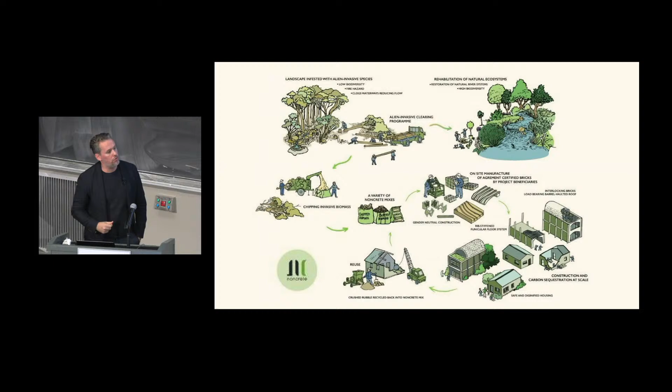And this is the last step. It's a full-scale fire test. So this is going to be exciting. In a couple of weeks, we do the full-scale test. And then maybe we can realize the vision of Noncrete to have a fully circular kind of building process all the way from dealing with these invasive plants, shredding them to really make a construction system based on that, to realize low-cost, dignified housing, as they call it there.

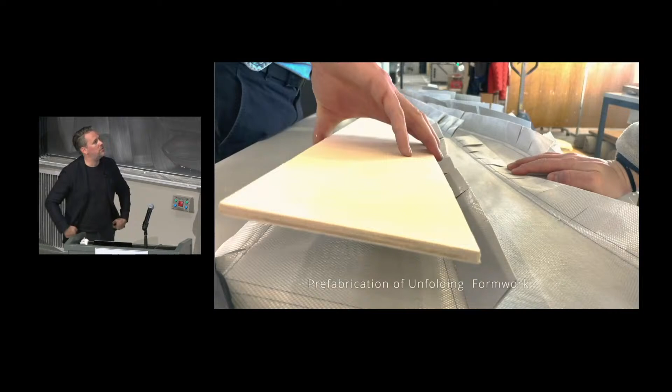And she not only addresses efficient shells, but actually also how to realize the formwork. So she developed this very low-tech, robust formwork system based on folded plates that kind of come together like an accordion. It's a little bit more complicated. It's called curved crease unfolding. There's some interesting mathematical research that is at the base of this, but for me what is most relevant is that these beautiful equations then translate into a super efficient system.

And so everyone in my team needs to find a way to somehow try to have impact. Maybe you recognize Lotte's little helper. He's sitting there in the room, right? He's now very excitingly studying here at ETH.

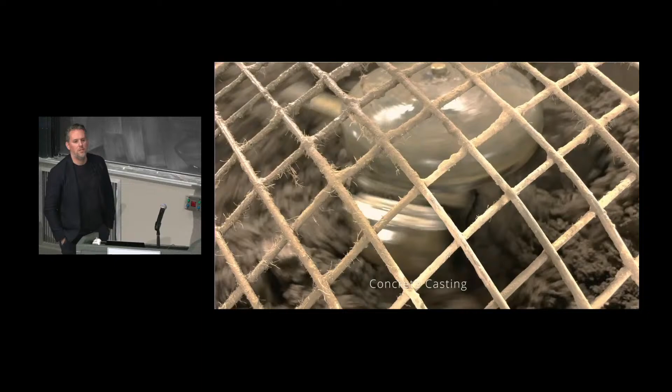But the key thing that I wanted to show, and Lotte feels very strongly about emphasizing, is that the entire project was realized when she was 7 months pregnant, right? And so she said, if I can do that in that stage of my pregnancy, between 7 and 8 months, it was finished all the way until 8 months, then I have proven that this is a very robust system indeed. So here you see this very simple sheet. You saw it being sewn together, very simple materials. You can then cast on site.

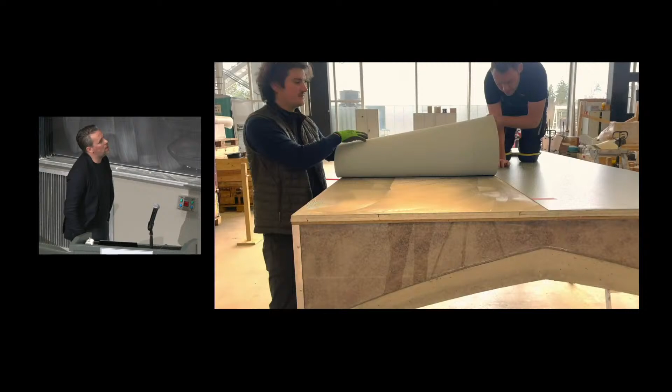Again, we are in our super sophisticated lab, so you could be maybe a little bit critical. Is this really scalable? So you will see where this formwork will go next. And then you take it apart and you can reuse it again. Super, super robust, easy to use. Beautiful use, again, of strength through geometry, both for the formwork and the resulting structure. Again, I have never presented this. Lotte does this part much, much better because it's her work, of course. And there it was indeed realized 1 month before Heidi. So beautiful result indeed.

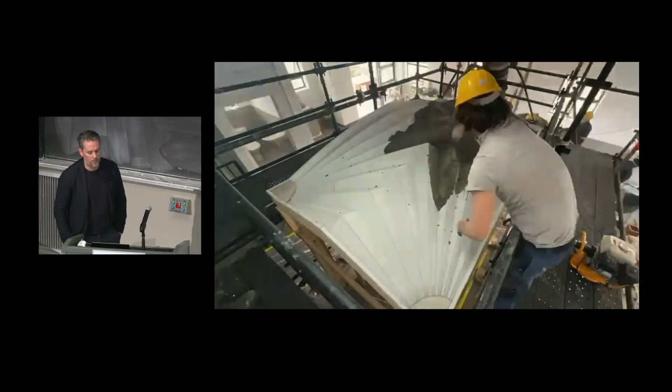So what happened? We thought, okay, the proof is in the pudding and eating it. So let's ship this formwork to our friends in South Africa and see if we can, just with minimal instructions, I mean, Mark being the minimal instructions, reassemble it and do it with their material there. So here you see indeed our friends, our colleagues, our collaborators casting a shell with their bio-concrete, which they call non-crete. This was the crew, and this was the result. So you see exactly the same. So the formwork traveled in two surf bags.

And what's beautiful about this material is also this texture, these things that come through. And so here then at the end, you see the surf bags here on the ground, you see enthusiastic Mark. And so the surf bags are back to us, and let's see where this formwork is going next.

Okay, so in closing, I talked about the impact we can have, right? Looking at this image and now realizing, I don't know if you knew this, I didn't know this, that 40% of the weight, so a lot of carbon, is in the floors there. So that is this stupid element there. Oh, sorry. This banal structural element that we all need. We really can make a difference by solving this, and the beauty might be in shells. We need to share. So I didn't talk too much about this, but I feel strongly about us working on this together. So can we share more actively? That's why we do COMPAS.

But at the end, in summary, I talked about structural geometry to reduce the mass. I talked about the right geometry. I look at stone, artificial stone, concrete, and that allows you to reduce the stresses and the carbon footprint. I gave you some hints how digital fabrication can help us realize these non-standard geometries efficiently without a lot of waste. I emphasized through the bridge, for example, the link between discrete masonry and all kinds of circularity opportunities, from reducing to recycling all the way to pure reusing of components, right?

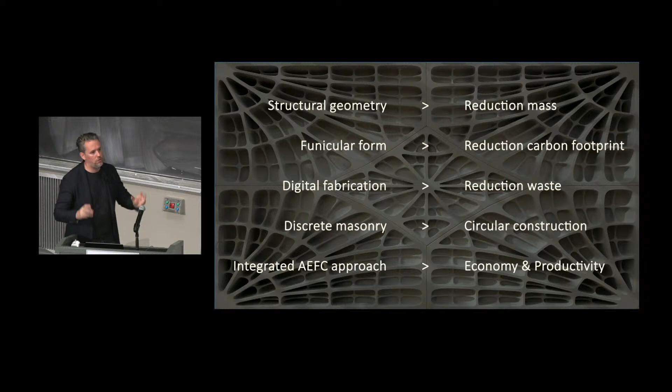And then at the end, I just added it for completeness. That is kind of hidden a little bit in how we approach things through COMPAS. You have to find ways to bring all of this knowledge together. There's otherwise no chance to introduce an innovation in a real project. And so we have to really have an integrated approach. I believe this approach can be computational. And that is important because we have to address economy and productivity. Otherwise, we will have absolutely no impact. So here as last image, this was a snapshot in 2018 of our research group.

The reason that I show you this image and I end with this image is because the cheerful colleague there in the middle with the glasses is Matthias Rippmann. He was the third partner in crime next to Tom and me, and sadly he passed away in 2019, and that is why we call the system after his name. Very convenient that Rippen in German means ribs, and so in that sense it's also nicely aligned, but we do it in his honor, and we owe him also a lot.